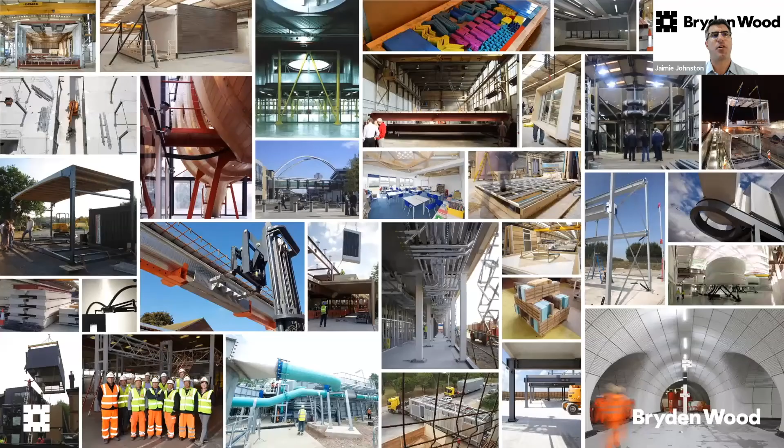So a quick potted history for those who haven't come across us previously. So we started out in 1995. I was actually employee number 1, so I've seen the whole transition we've been through. We started out initially as a firm of architects, but we always had an interest in how to get all the benefits of manufacturing, so productivity and quality and safety and cost reduction, into construction. So we started developing industrialized construction solutions probably a long time before a lot of our peers, and obviously that's now become one of the real interests and focuses of the industry.

So we went on this journey where we realized very early on we had to be very integrated. So we quickly moved from being architects to having all of the design disciplines in-house and breaking down the sort of silos that exist between the disciplines. We then went on a strange journey of developing solutions that technically could be built, but the market wasn't particularly excited about delivering. So we started prototyping things ourselves, which is a very unusual thing for a consultant to do.

And then we eventually ran our own factory for about 8 years, delivering small schools projects and supermarkets. So we don't have the factory anymore, but we do have a prototyping facility. So one part of our journey was going very deep into industrialized construction, running a factory, really understanding what that means. And we were delivering and continue to deliver 20-30% capital cost savings, 20 to 30% schedule reduction. So one way of looking at it is to go, well, that's fantastic, mission accomplished. We were kind of doing what we set out to do.

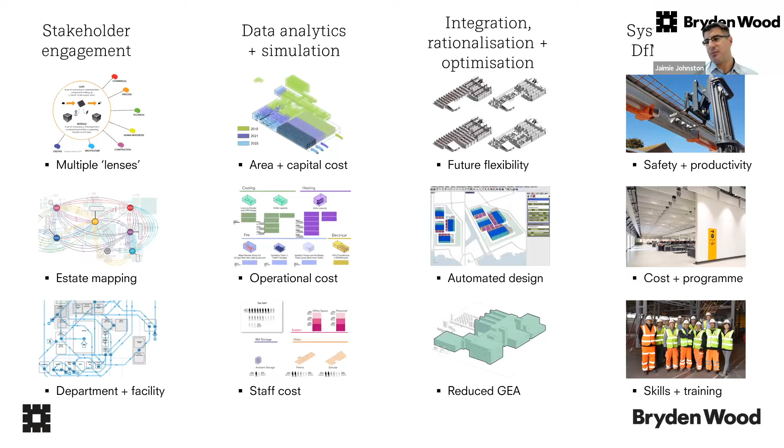So we started saying, well, actually, if we want to do the systemized construction piece on the right hand side, there's a particular way of designing and rationalizing that needs to happen before that. Then moving left, to do that we probably want to do much more data analysis and simulation, and before that, even on the very left hand side, we really need to start engaging with clients much earlier. So as evidenced by John being here, we tend to work with long-term clients. We tend to form much longer relationships and get the ability over time to start earlier and earlier in a project with them.

Yeah. So the design to value process, the words design to value came from processes adopted in the product world, the design of products, particularly products that you see on your supermarket shelves. And the whole idea was to really understand what the value of that product was, and stripping away anything that used energy, used resources, but didn't add value, and to come up with the optimum product. So that was the idea.

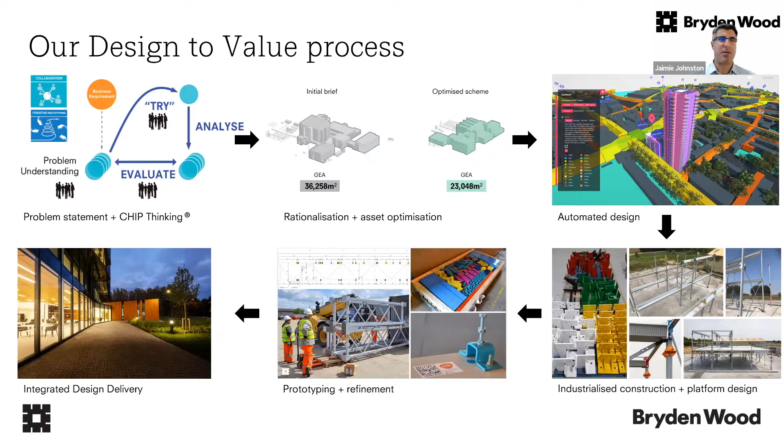Very often the same logic then reveals a kit of parts or industrialized construction solution. Very often then we prototype it and then we deliver these things. So in our heads, there's a range of these tools that come together. So in this talk, we're going to talk about probably the first half of the process.

So use of data analytics, a methodology we developed with John called CHIP Thinking, and an increasingly hot topic now for lots of our clients is how to develop a super rationalized, optimized design that can then be configured either for specific sites or particular geographies, so that they can really maximize the benefit in a central design and not have to rework things and pay for bespoke design every single time they do a project.

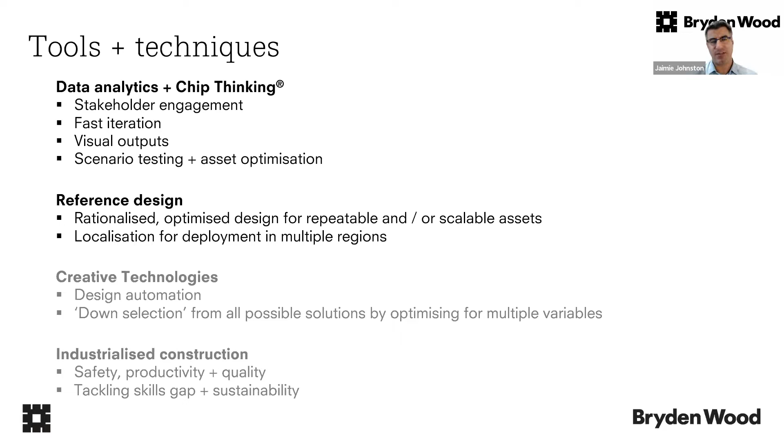So as Jaimie alluded to, if you say, actually what I want to do is treat 3,000 patients per year for the next 5 years, that's very different from saying I want a hospital with 200 beds. And it keeps that really wide open to start with. It opens up the widest space for thinking about and innovating what that might look like. So that's really important.

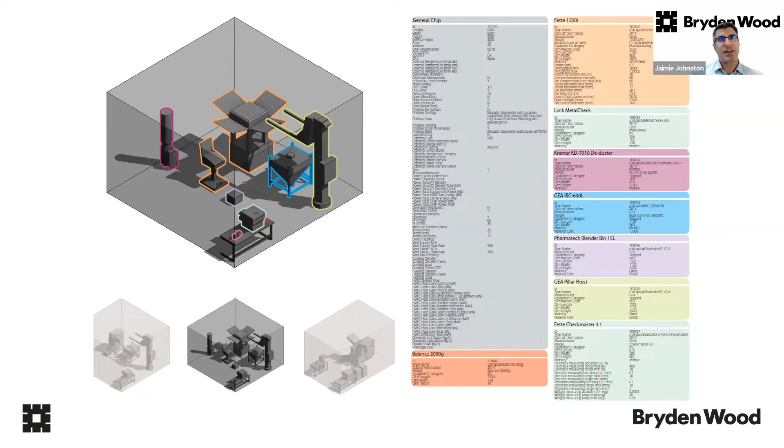What it means is you can then plug these things together very, very quickly. So either to model an existing facility or model a potential new facility, whether that's a pharma facility, hospital, data center, whatever it is. We use these to very quickly generate a sort of working model that we can then start to test things against. So we've now got probably thousands of these for Glaxo. We've got libraries of them for healthcare, for data centers, for other clients.

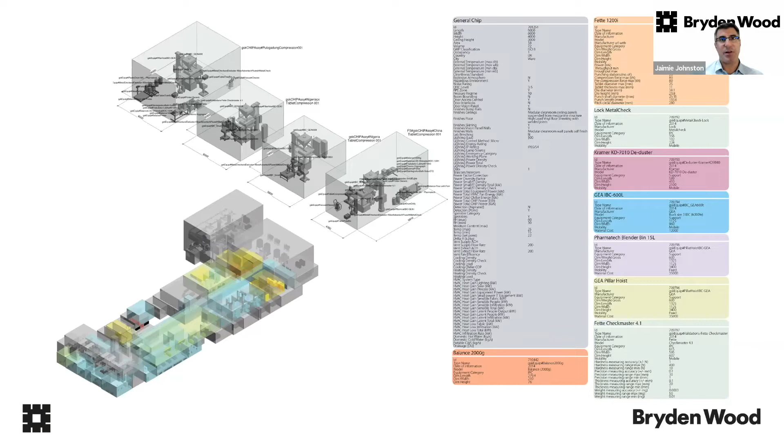We're starting to build up our chip libraries. But what it means is we can then very quickly build a model and test things. So this diagram is describing three drugs or consumables being made. Goods come in, they get stored, they get processed, they get stored, they go out the door. So you can imagine at this level, it's incredibly quick to test this and say, what happens if we have more storage but fewer vehicle movements, or vice versa? What happens if we add a line or remove a line?

What happens if we drop a chip in that does this? So we often use this firstly to test endless iterations very, very quickly. Some of these will be chips that we absolutely know how they work. Some of them can be hypothetical chips that we'll drop in and say, if you had a chip that did this, this would be the impact. We need this chip, so let's go and talk to GEA or someone to see if they can make us a piece of equipment. So at this level, it becomes really quick to test ideas and get some data outputs, as John says, simulate things quite early.

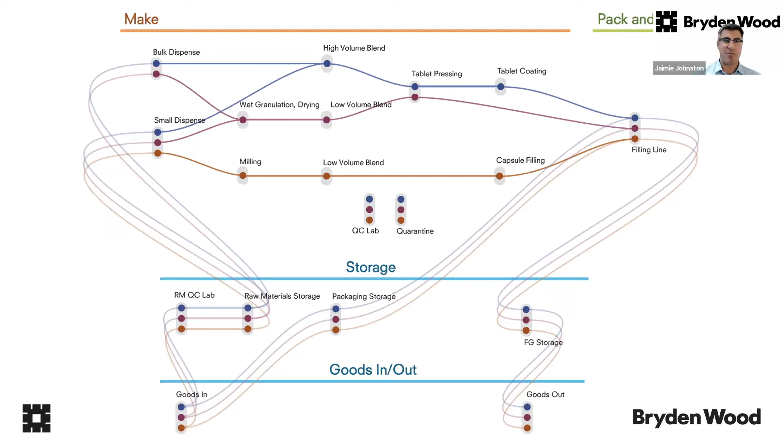But we'll do it at individual process level. Sometimes we'll do it at facility level to say, here's the optimized process flow. Here's actually what happens on a site or across a campus. You can see where the bottlenecks are, so it starts to reveal something at campus level. John mentioned earlier an Africa scale level, looking at how to tackle the African market. So we do it at a range of scales.

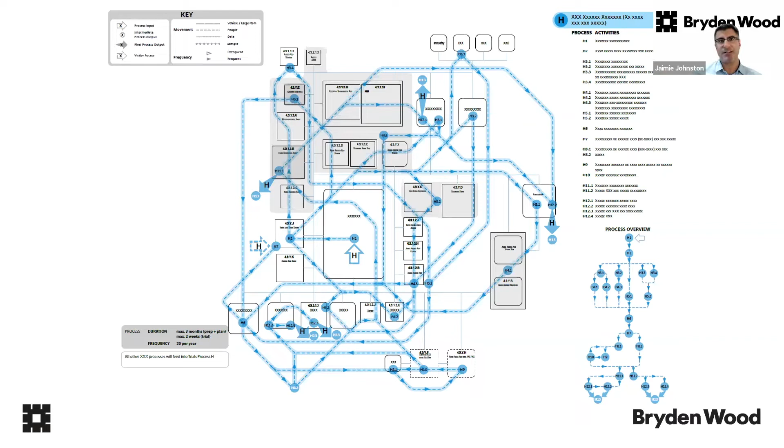Sometimes we do things like this. This was a study where I think there was a potential need for a new facility. And one of the things we did was just go into all the rooms and measure their usage and utilization and start to look for opportunities to make underutilized rooms multifunction, or share rooms between departments, or find ways that you could not have to build a new facility, but just increase the utilization of the existing facility. So again, that's another good use case.

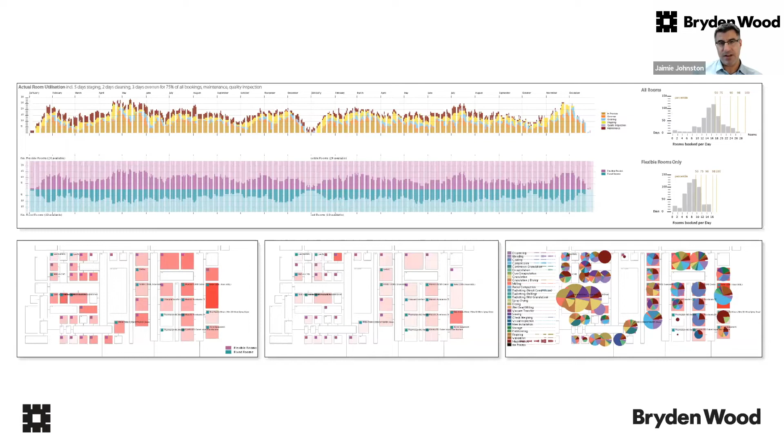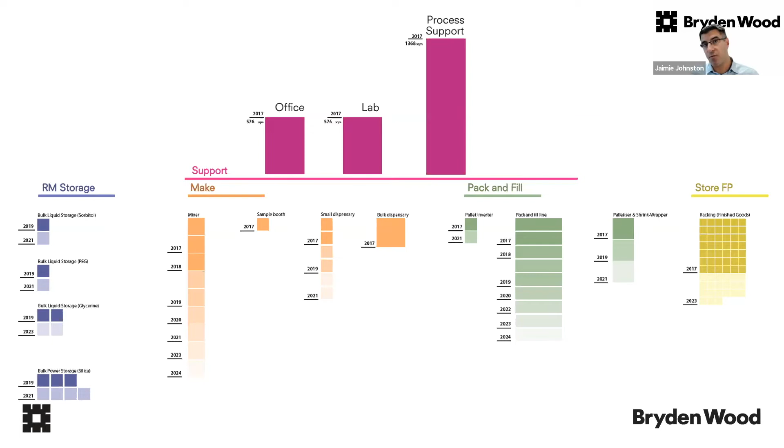But as John said earlier, what we realize is no one reads reports particularly, but if you can boil things down to a handful of graphics, like the flow charts that described a hospital I mentioned earlier, we very often try and generate these sorts of graphics, which are super visual and tell you something quite important. And you can see here, for instance, the color fading as we go into the future. So we're saying the data is quite good up to 2017, a little bit less good for 2019. It's a total guess by the time we get to 24. So we're trying to convey the quality of information, the level of certainty. And again, not say to people we know the answer, but we know within a range this is looking like a sensible way forward.

This was from one of the earlier things. Because every chip knows how much air and water and utilities it uses, as quickly as you're assembling your process chips or your room chips, it's totting those up and working out how much power you'll need and how much water and how much air. So it's also starting to self-generate potentially utilities, and all the mechanical electrical systems are getting generated off the back of putting the chips together.

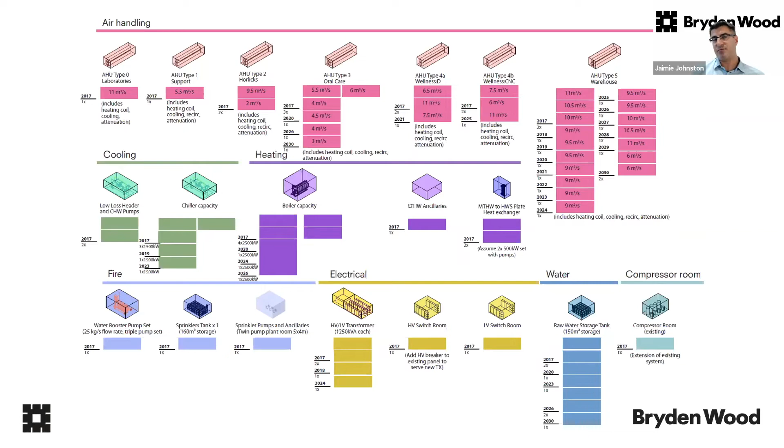So it starts to then self-design some of these primary systems, which means we can often then start to predict running costs. So bear in mind, we're nowhere near designing a facility at this point. We can sometimes have a pretty good idea how much it would cost to run the facility, and then we can start to look at predictions of energy costs and say, well, how do you start to choose your primary plant?

Is it better to be air-cooled or water-cooled, depending on the cost of these things? And as John said, that was critical in one of the early stages of this to kill a project, by saying, well, actually, it's the utilities cost that doesn't stack up. You can't fix that through design, and so the project shouldn't persist.

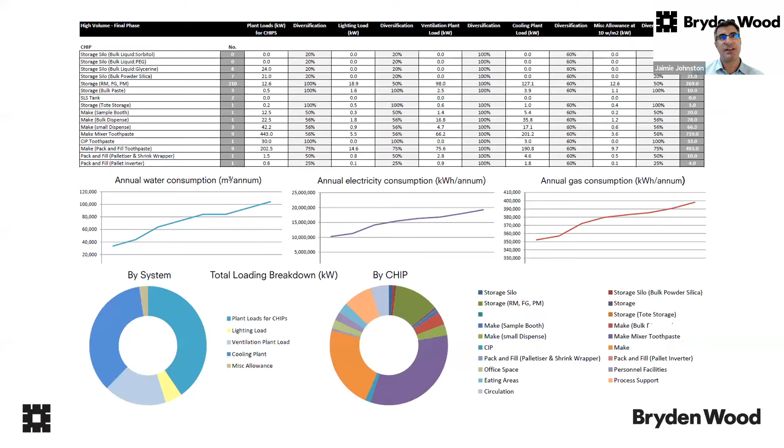I mentioned right at the start, we'll typically try and put staffing costs into these things as well. So again, as you're generating your early chip models, you're also predicting your running cost and staffing cost. And again, that's things we've seen in projects where, mentioned earlier, the building looks beautiful, but it costs a fortune to run because they're having to have operational policies and lots of staff to manage the asset. So if you can tackle this early on, that has a huge potential impact on the viability of certain projects.

I was just going to say one thing on that slide, just to quickly say, is the quality mark, data quality mark. So one of the things we're very aware of early in projects is that the amount of data or the quality of it is very varied; some things are just guesses. And what we very much try and do is make sure that people are aware of that. Because otherwise people take all the information to be of the same quality and make decisions about it.

So that red means that that's just a guess at the moment as a piece of information. It needs to be validated, but it's a starting point to start to think about it. And it would go green when we're much more certain about that information. So the visual markers like that we find very useful to have better conversations.

And also, that came around because we were going to ask a subject matter expert 15 questions. 14 of them they would answer because they knew exactly what the answer was. One of them they didn't know, so they guessed, but they wouldn't tell us they were guessing because they didn't want to say, I've no idea, no one's ever asked me that question. And then we'd run the analysis and you get some crazy results. And when you did the sensitivity analysis, you'd find there was one piece of data which was super critical and they'd say, oh yeah, I've got no idea whether that's true or not.

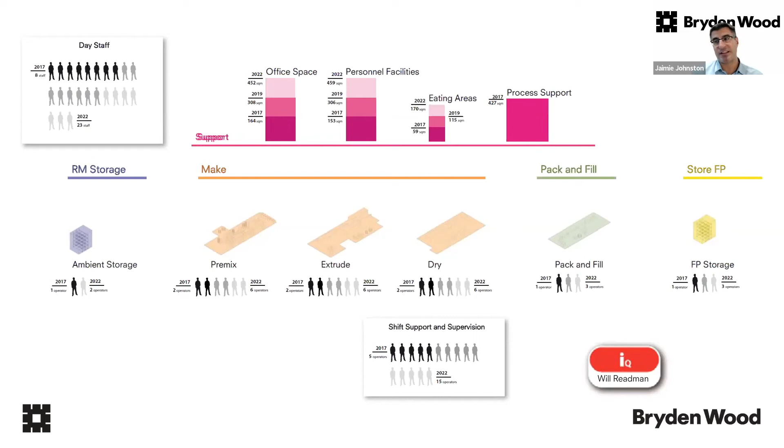So we started saying to people, it's okay to guess as long as we know you're guessing, and then we'll tell you whether that's important. So some things you could be out by a factor of 10, makes no difference. Some things are super critical. So that thing we should spend some time and effort to get better data or test more things. It starts to tell us where to put our effort.

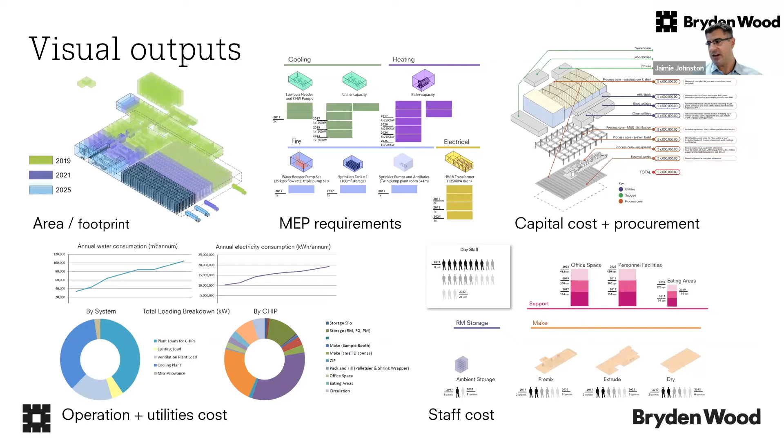Yes, that's a sort of summary of all the sorts of things that will typically come out of a report. We'll be looking at not just a single phase typically of a facility, but multiple phases and an expansion strategy and how it might change over time. We'll be looking at obviously running costs and utilities costs, staff costs, and increasingly this is a sort of precursor then to the industrialized construction, the sorts of kits of parts that we might start to use.

So this is the last slide and then we'll chat a bit more, but these are the sorts of benefits that we're seeing. So faster option appraisal because we can test and analyze these things much quicker. Joint decision making because of it being very clear who's contributed information, what information they've contributed, and the transparency of people being able to see how their information influences others.

So one of the first healthcare projects we did, I remember going back to the security person and saying, look, we didn't manage to meet your security brief or give you all the things you wanted from a security point because we thought daylight for patients was more important, and so we've prioritized daylight, but it does mean that this visual access doesn't work. Do you agree that was a good idea? And even the security guys were going, yeah, I think in the balance of things that's probably a better thing to do. So we often broker these conversations where one stakeholder can see why they're not getting their preferred thing, but it's for the greater good, and they've contributed to that and they feel involved.

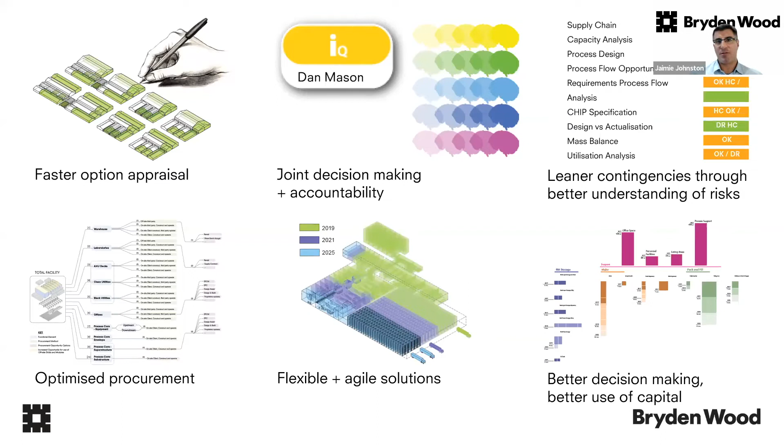Leaner contingencies on the right, that's the sort of color coding and seeing where the risks potentially lie. And then, underneath that, we then get into better procurement, more agile solutions, overall better decision making. So I'll stop sharing the slides there.

I was going to talk about the prisons program in a bit, but I don't know if there's any particular key moments in the CHIP thinking or key projects we've worked on that you think are worth elaborating a little bit on.

I think I would just notice the time, and there's only about 15 minutes, so we want to leave time for some questions. But I think the prison one is a really good example because of that range of value that you're looking for, and why really it wasn't about building a prison, it was about something else. So I think it's worth talking about that.

Yeah, okay. So I think there's something really interesting actually: John had seen a really early version of this that we'd done in healthcare, and we started doing it for GlaxoSmithKline. The Ministry of Justice, who we were working with, were watching what we did with GlaxoSmithKline and going, well, that's quite interesting. What's our version of that process? So they came to us in 2016 and asked us to design a new type of prison. This was for the prisons program in the UK.